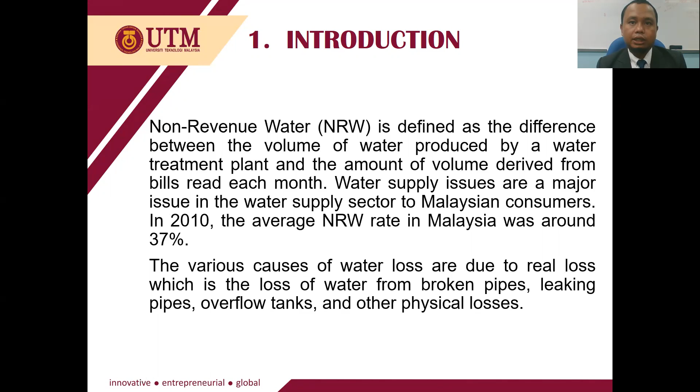The various causes of water loss are due to real loss, which is the loss of water from broken pipes, leaking pipes, overflow tanks, and other physical losses. I give you an example. A water treatment plant produces 1 million liters a month. Through the bills collected by the water company, only 600,000 liters of water were recorded. The remaining 400,000 liters are considered NRW. The NRW percentage is 40%.

Problem statement. Non-revenue water NRW rates are a major challenge for the water supply industry without a good and efficient plan. On average, the NRW rate in all states in Malaysia was 37% and registered a 1% decrease to 35.6% in 2014. This indicates that the percentage of losses due to NRW is still borne by many water providers in Malaysia. Proactive measures need to be carried out holistically and effectively to ensure that the non-revenue water rates are controlled and reduced in the short run.

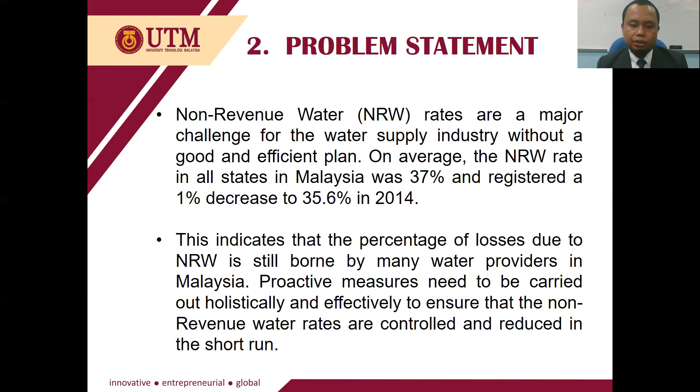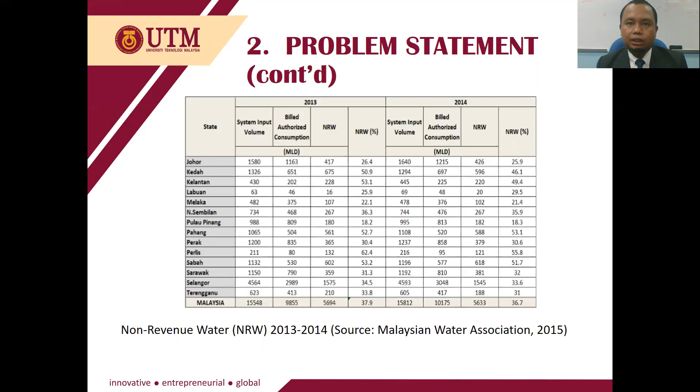Now let's look at the percentage of NRW by state in Malaysia in 2013 and 2014. The table shows that Perlis recorded the highest NRW in 2013 at 62.4% and 55.8% in 2014, while the lowest NRW was Pulau Pinang, 18.2% in 2013 and 18.3% in 2014.

Aims and objective of study. The objectives of study are to identify the criteria involved in the selection of location for implementation of active leakage control programs, and to analyze non-revenue water based on the strategy of implementing active leakage control programs.

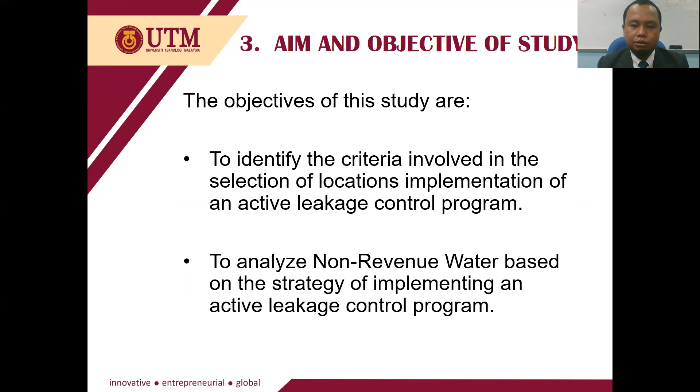Scope of study. The purpose of study was to identify the effect of the active leakage control program conducted under the supervision of Pengurusan Air Selangor, Hulu Langat Region, at District Metering Zone DMZ HL014 Taman Rakan, HL268 BBB Section 10 and HL017 Sungai Kantan.

To meet the objective, the study will cover the following areas: collect data on leakage rate at the study site, use the search and repair method in implementation of the active leakage control programs, and analyze the result of the active leakage control program against the non-revenue water.

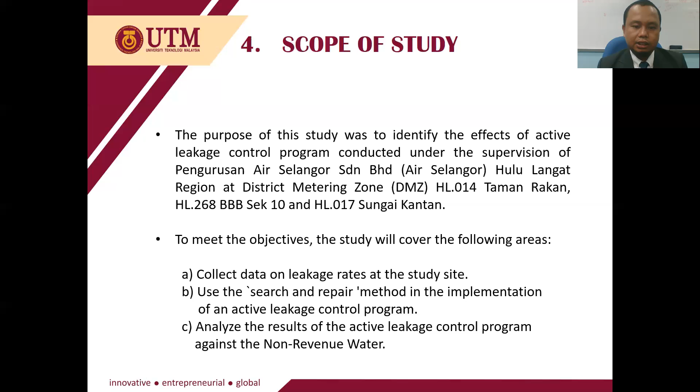Methodology, step test. Normally, the flow of water into the district metering zone, DMZ, will be recorded on the flow meter and the flow rate will be lower each time the shutdown of the step test valve or step isolation is made for the area within the DMZ. Data capture tools such as loggers on the flow meter or manual readings will be made on the DMZ flow meter to record the flow rate at the closing of the step test valve.

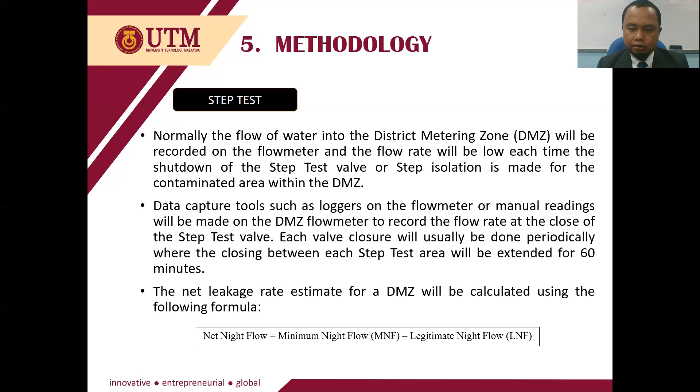Each valve closure will usually be done periodically, where the closing between each step test area will be extended for 60 minutes. The net leakage rate estimate for a DMZ will be calculated using the formula: net night flow equals minimum night flow, MNF, minus legitimate night flow, LNF.

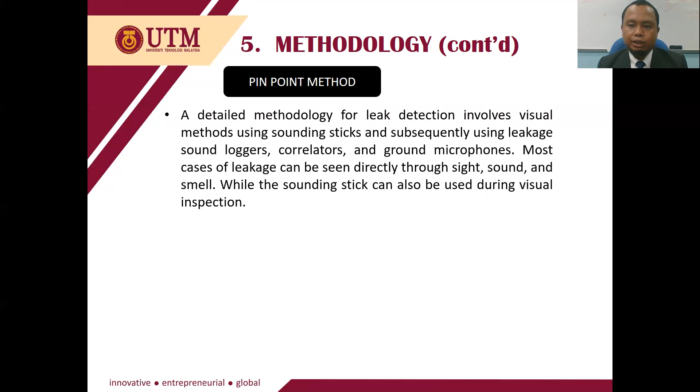Pinpoint method. A detailed methodology for leak detection involves a visual method using a sounding stick and subsequently using leakage sound loggers, correlator, and ground microphone. Most cases of leakage can be seen directly through sight, sound, and smell, while the sounding stick can also be used during visual inspection. However, if leaks cannot be found visibly, despite the fact that there is a leak hidden in the pipe, a detailed investigation should be made between the parts of the pipes.

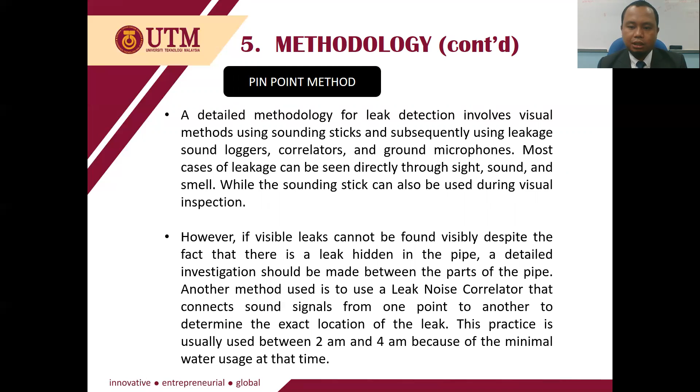Another method used is a leak noise correlator that connects sound signals from one point to another to determine the exact location of the leak. This practice is usually used between 2 a.m. and 4 a.m. because of the minimal water usage at that time.

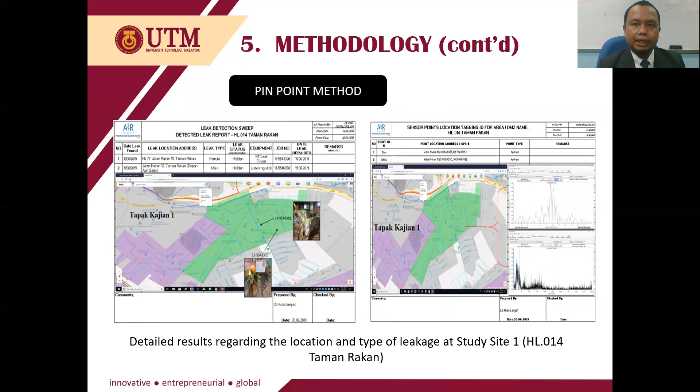This is a detailed result of location, types of leakage, and instruments used in the study. Site 1, HL014 Taman Rakan. The types of leak found were a pipe burst at Jalan Rakan 12 and ferrule leaks at number 77 Jalan Rakan 15. The use of instruments is very important in locating the actual incident of the pipe burst. In this situation, a leak noise correlator and listening stick are used.

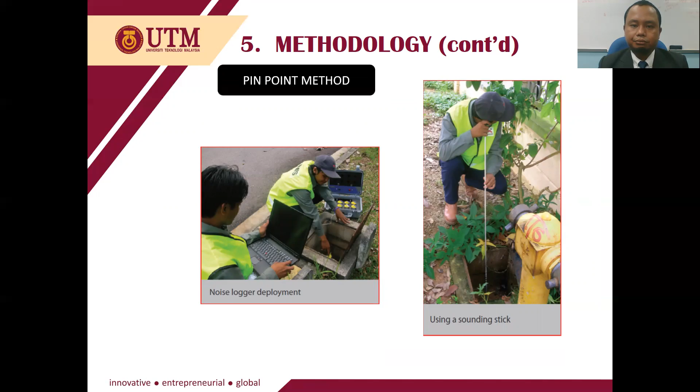This is an example of pipe leak detection works that use instruments such as listening stick, leak noise correlator, and noise logger deployment. Result. According to the first objective, the location selection criteria of the leakage control program is an important basis for determining the correct level of location selection requirement in ensuring that it can have a positive impact.

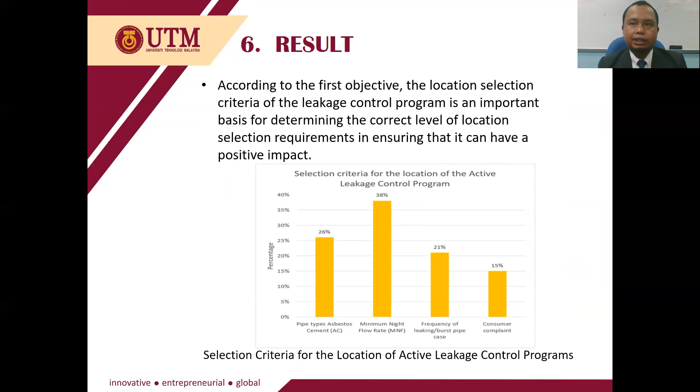This graph shows that minimum night flow recorded the highest decision, by 38% compared to others, to meet the selection of active leakage control program criteria. Minimum night flow is a very important medium for analyzing leakage rate in an area. Let's look at the minimum night flow differences before and after the implementation of the active leakage control program.

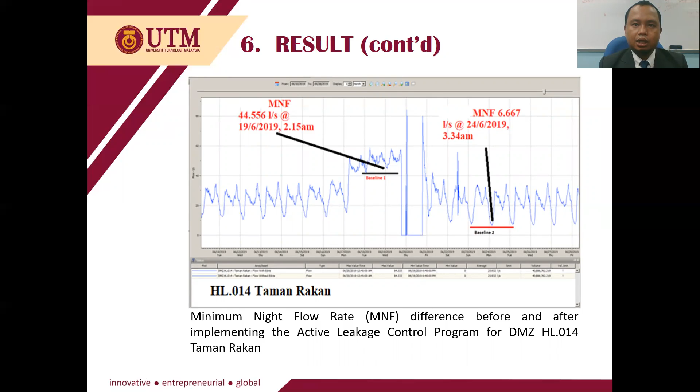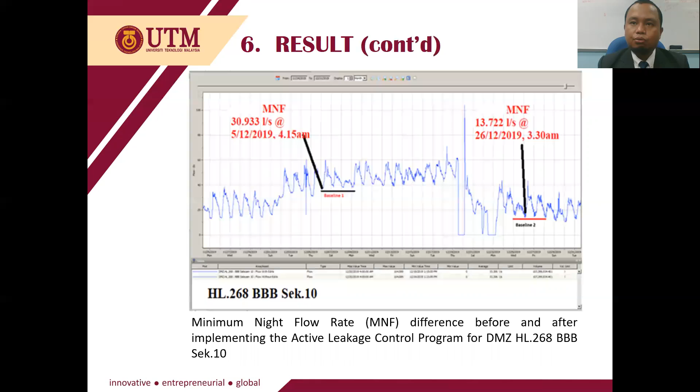For study site 1, HL014 Taman Rakan, the saving rate was 37.889 liters per second. While study site 2, HL268 BBB Section 10, gained savings of 17.211 liters per second, and study site 3, HL017 Sungai Kantan, recorded close to 2 liters per second. This gives a good return to water supply companies to reduce the non-revenue water rate.

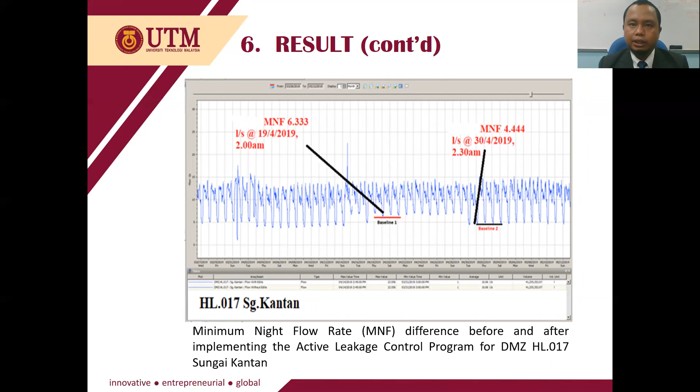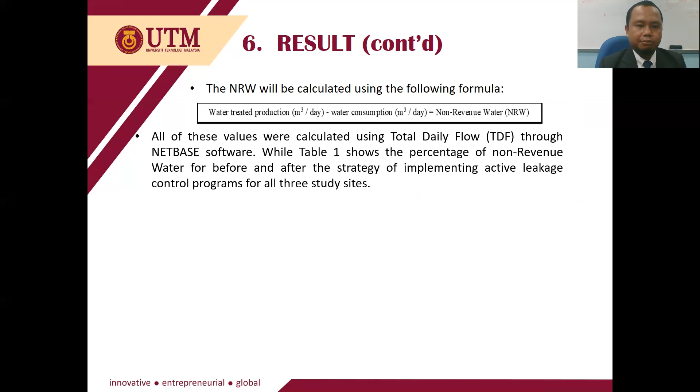Overall, the NRW will be calculated using the following formula: water treated production minus water consumption equals non-revenue water, NRW. All of these values were calculated using total daily flow, TDF, through NETBASE software, while Table 1 shows the percentage of non-revenue water before and after the strategy of implementing the active leakage control program for all 3 study sites.

Figure 5 shows the percentage of non-revenue water, NRW, before and after the implementation of the active leakage control program at all three study sites. HL014 Taman Rakan recorded a 45.35% decrease, while there was a 34.3% decrease in NRW percentage in HL268 BBB Section 10 and a 6.3% decrease in HL017 Sungai Kantan. Given the significant decline in the three study sites, the water supply companies will have good returns and positive impact.

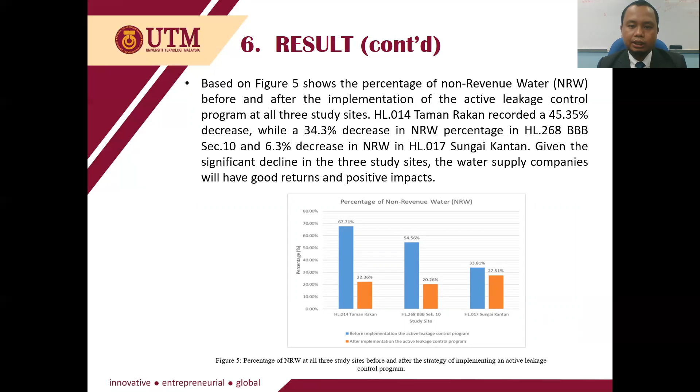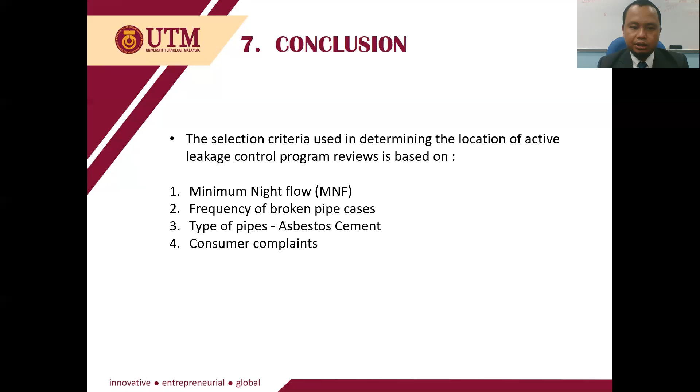Conclusion. The selection criteria used in determining the location of active leakage control program reviews are based on minimum night flow, frequency of broken pipe cases, type of pipe, and consumer complaints. Therefore, it is clear that active leakage control program strategies can control and reduce non-revenue water levels. Water supply companies need to ensure that treated water wastage is minimized to meet increasing consumer demand each year.

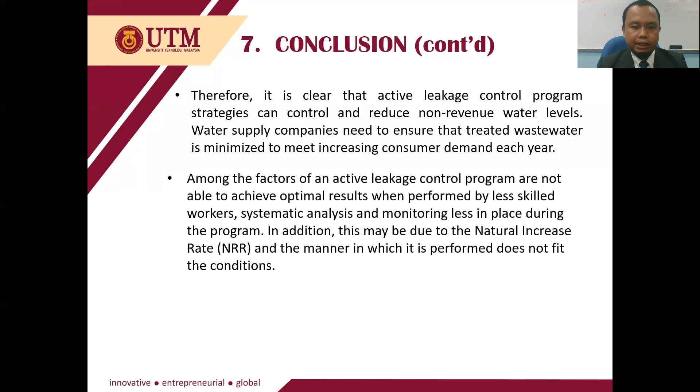Among the reasons an active leakage control program is not able to achieve optimal results are when it is performed by less skilled workers, and systematic analysis and monitoring are less in place during the program. In addition, this may be due to the natural increase rate (NRR) and the manner in which it is performed not fitting the condition.

Recommendation: the pipeline replacement program is one of the alternatives for controlling and lowering the NRW rate. The replacement program should be focused on asbestos cement. Pressure management can be done using a pressure reducing valve (PRV) and pressure control technology based on flow rate or critical pressure location. This alternative of pressure management is more economical compared to pipe replacement.

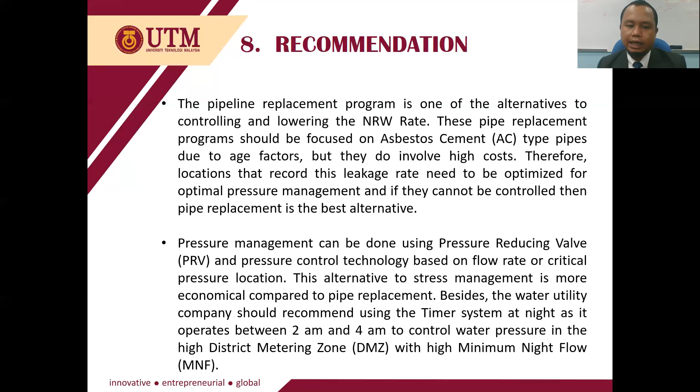Besides, the water utility company is recommended to use the timer system at night, as it operates between 2 AM and 4 AM, to control water pressure in the district metering zones with high minimum night flow, MNF.